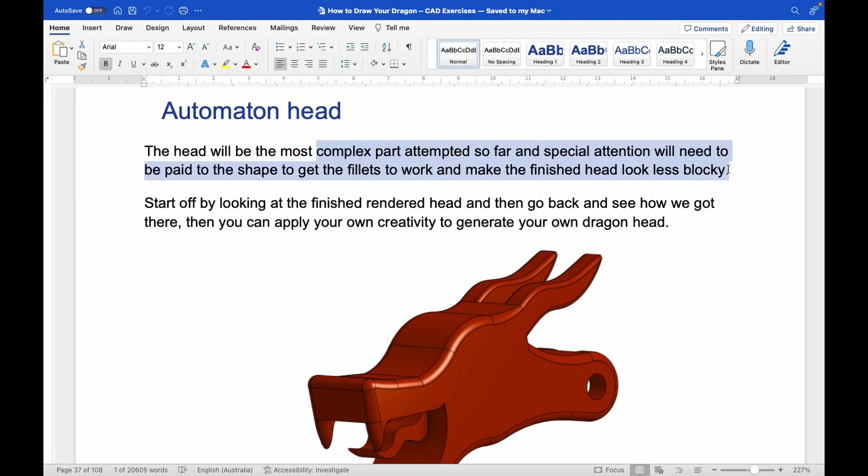So you can customize this a little if you wish. More teeth, less teeth, shapes, things like that. But we need to all start in the one place. So if we look at this section of the drawing, we've got to draw a block to start with, 42 by 20. And through the origin, we've got a circle, the center's on it with a diameter of 15, and then two concentric circles here.

The diameter 8 circle edge touches this line at the midpoint, which means it's 4 mm in, and from that center point there we have a diameter 3 circle. Let's start there. Okay, so we're still in our Dragon components. Add, create part studio.

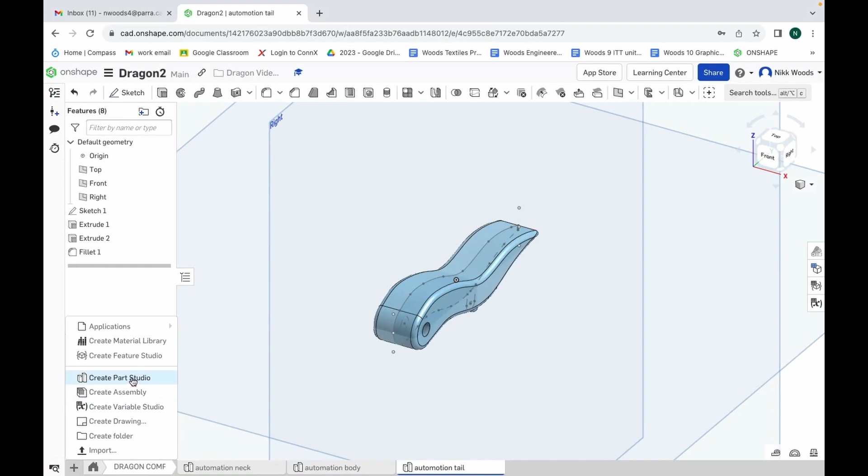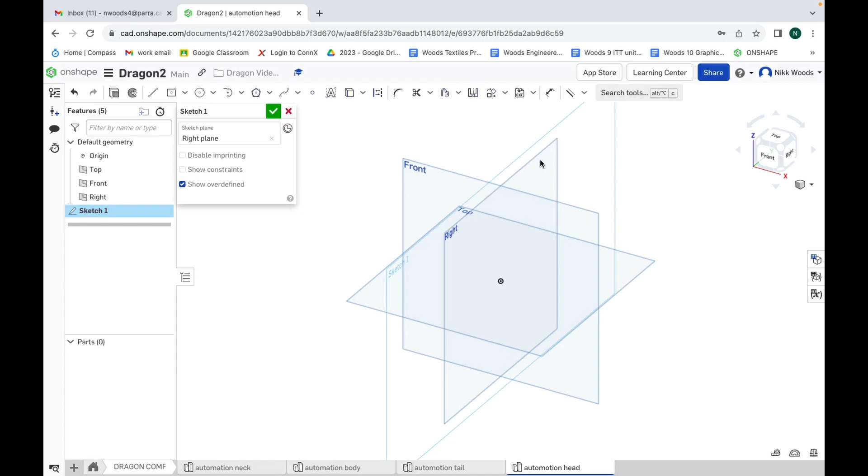Right click, rename, Automotion head, enter, and we're drawing this from the right plane. So sketch, select the right plane, click N, away we go. Rectangle, click, move, click. We said that needs to be 42, enter, and the next one is 20, enter. So it mostly fits in here, but to start with, definitely. Okay,

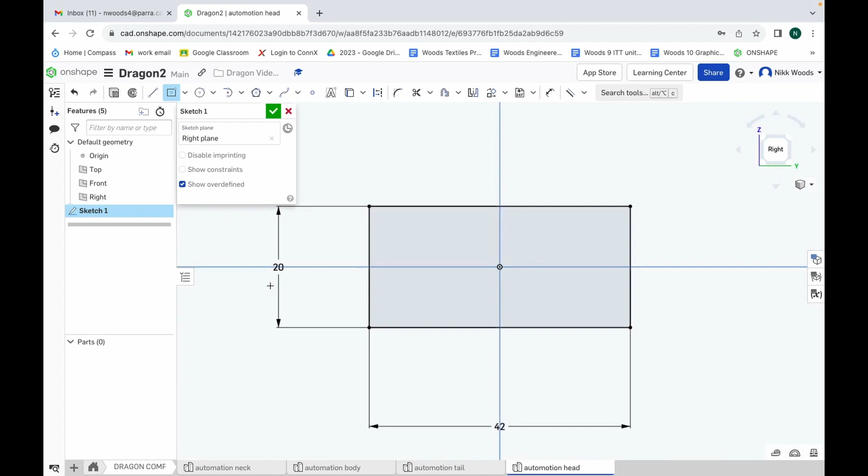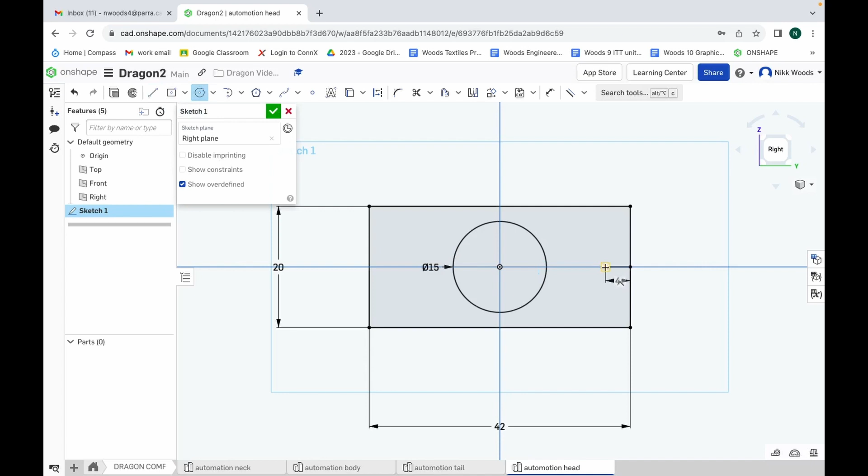let's make it bigger. Right, so circle, easy one from the origin, click, click, and we're making that one diameter 15. Enter. Okay, I'm going to come out here to the midpoint here, and I'm going to come back and make that 4 mm. Enter, escape, circle. This one, click, click, we're going to make that 8. Enter, and circle again, click, click, and we're going to make that one 3.

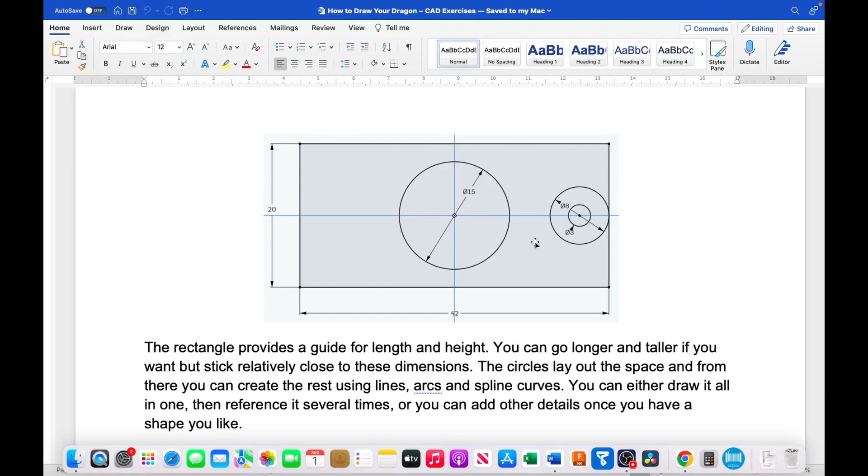Enter. M for trim, let's get rid of that construction line. And that's the first part of our drawing done. Okay, leave the sketch open. We're going to come back here, and we've got a radius of 16 here. We've got a radius here of 10 and a radius here of 12.

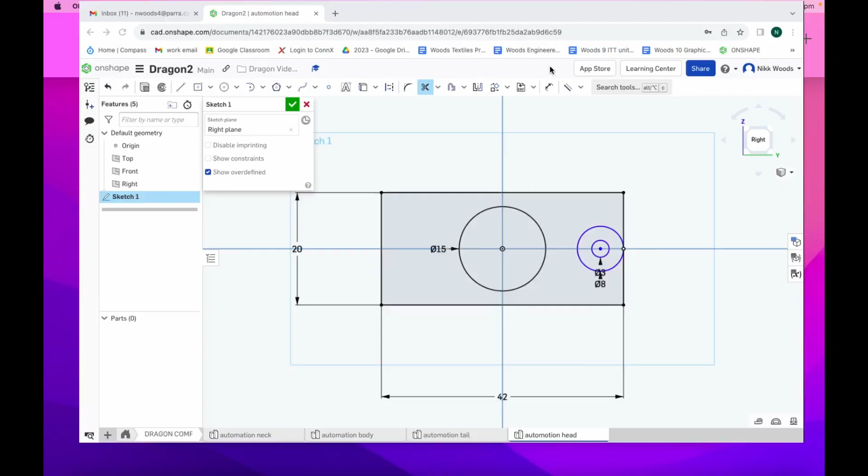And so you're going to use the 3-point arc tool from about 2 o'clock to 11 o'clock. Type in your radius of 10 and then do your tangents. Same method down here. Okay, we'll do the 10 one first. So from, what do we say, about 2 to 11. So 3-point arc tool from about 2 to about 11. And we want that to be 10.

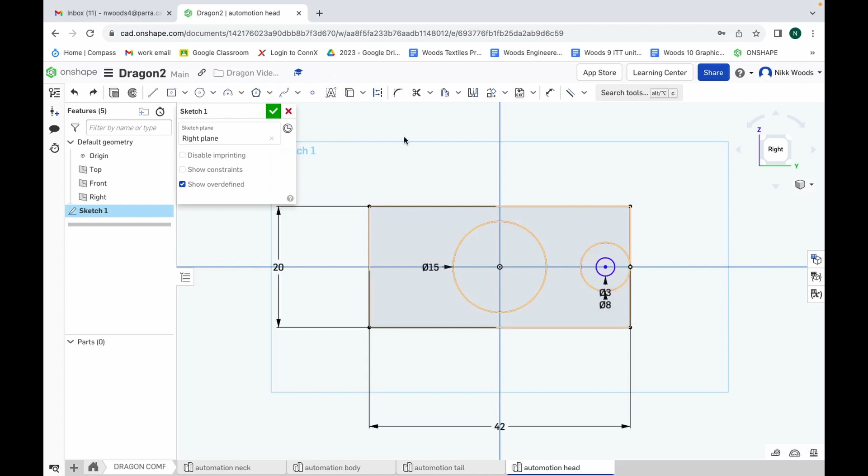Enter. Whoa, that should not have moved. Control Z. Let's make sure nothing's selected. Escape. Okay. 3-point tool. Just going to zoom in here. From about 2. About 11. Enter. Interesting.

I think this is a glitch. This happened earlier when I was working on a different part, and then when I closed it, came back in, it didn't do this. But I do believe I found a way to fix this. Let me see if it works. So I want to make the distance from, yeah, see, and it's moved it up off that horizontal line as well. I want to make the distance from here to here.

No. Dimension from here to here is supposed to be 4. Okay. And the dimension from here to here is meant to be 0. Okay, so let's just put it back in place and kept that radius at 10. Hopefully you don't have to do that, but now you can see that you can move things back if it does move on you, but it shouldn't.

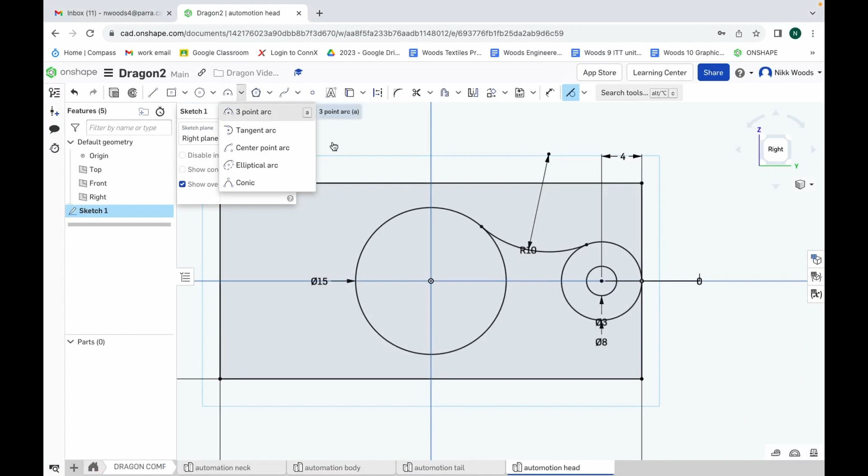About 5 to about 7, radius of 12, enter. Okay, let's do our tangent tool. Okay, nothing moved, see? Very strange. Same technique, two different methods, but we can fix them.

Okay, so there's those two set curves, and there was one coming up this way at a radius of 16. So he comes across and he's just off to the left of that point there. So I'm just going to eyeball it. Three-point arc. I think he was from about there to about there. And he was a radius of 16. Oh, he comes right from there. I'll go back and fix that up.

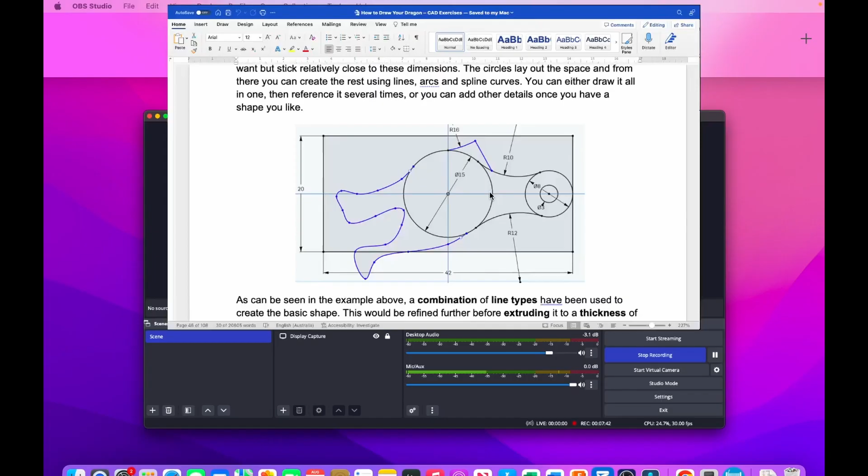Okay. Ooh, he looks a little different. He just gets cut off shorter. That's okay. So I'm going to draw a straight line from here to where it intersects up there. So from about there to there. Okay, M on the keyboard. I'll just trim that off. Just going to check down here. Yeah, I've got him on the line.

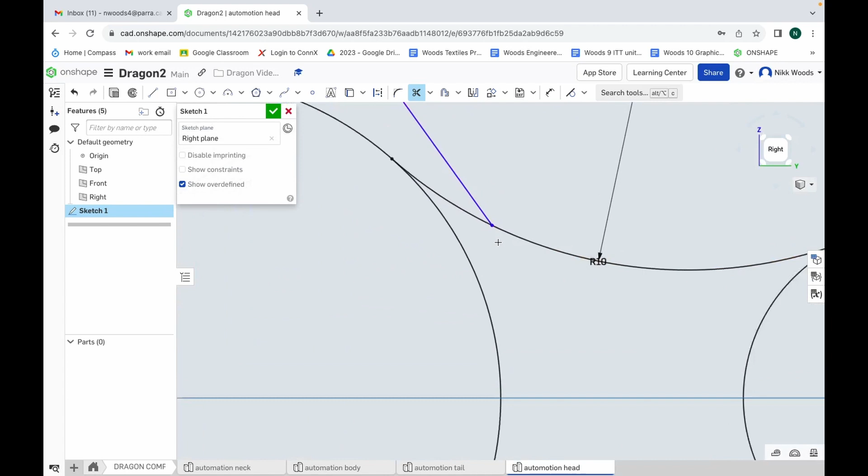Okay, so those were the things that were set. That radius, that radius, that radius, and we just drew a straight line in here to cut him off. Okay, let's jump back to our instructions. The rest of this is freehand. Okay, so using the spline tool and using a straight line as well when you want.

Okay, so you've got to think if you want to put some teeth in here, it'd be better if you had a straight line. Where the tongue is, you might want to have a straight line to work off there. You might want to have a straight line down here. Up to you. So I'm going to give this a go. And we'll see how it turns out.

Okay, so jumping back into Onshape, I'm going to use the Spline tool here. I'm going to start about here. Start to come down and curve. I already don't like it, but that's okay.

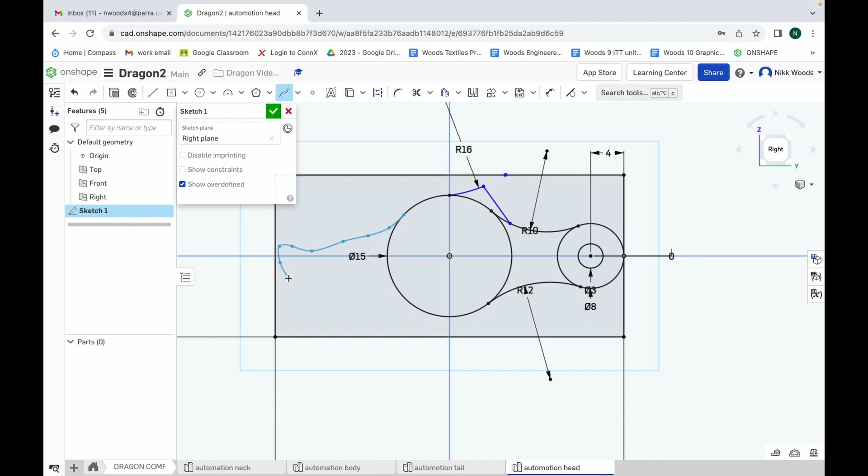I'm going to hit escape here. I'm going to get up a straight line tool and draw a straight line. Just going to zoom in a little. Just going to draw a little straight line just there, and escape, and I'm going to go back to my spline tool, pick up from there.

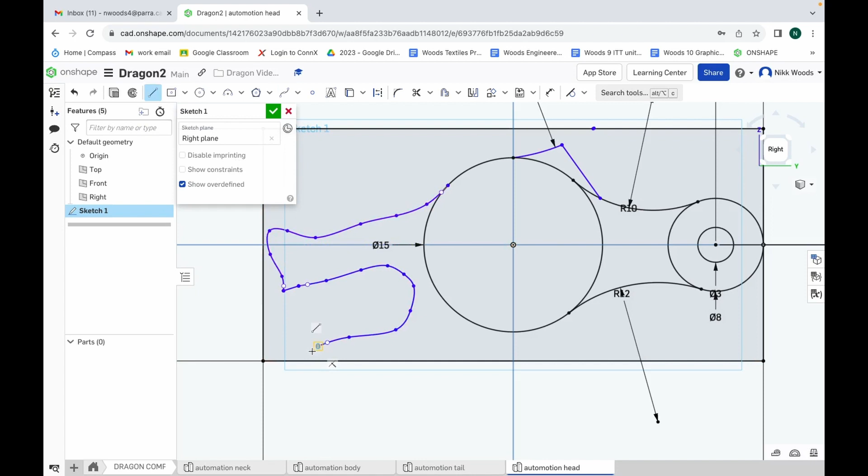I'm going to escape there and use a straight line. So I just want to have another tooth on the edge there maybe. Escape, and I'm going to jump back to my spline tool.

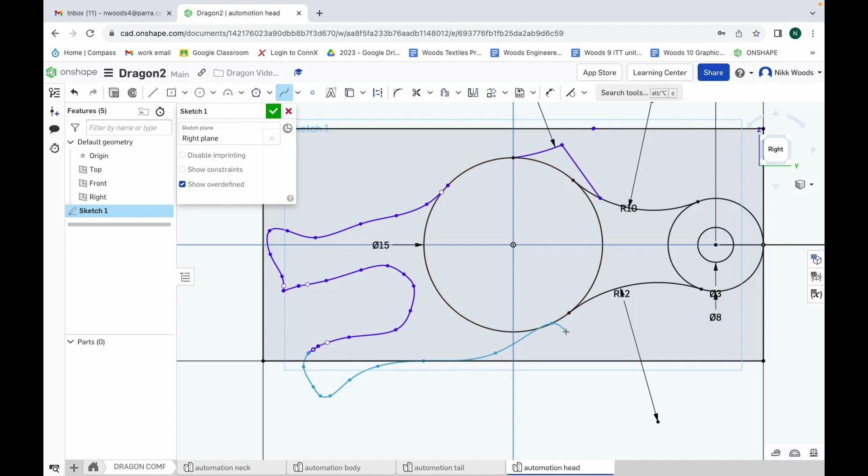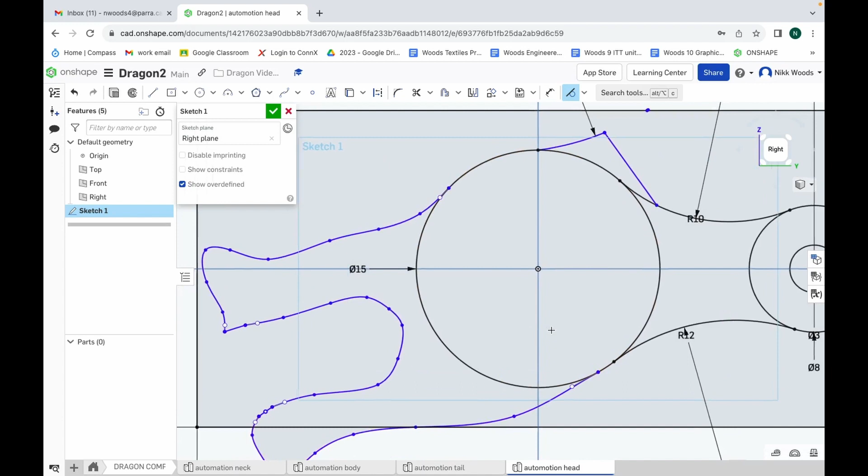Escape. Okay, and now I'm going to fix up my tangents here, hopefully. Whew, stressful. Tangent. This line to this circle looks pretty good. And tangent this line to this circle. Okay. Alright, not too bad. I'm no artist. Okay. Jumping back into here.

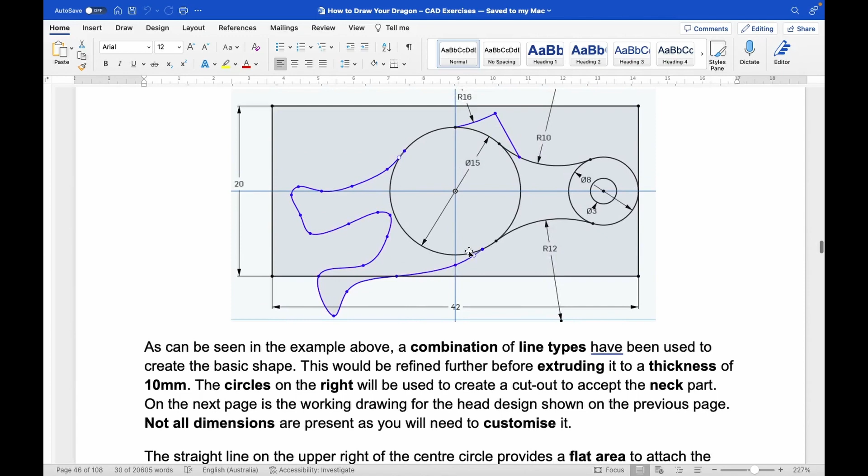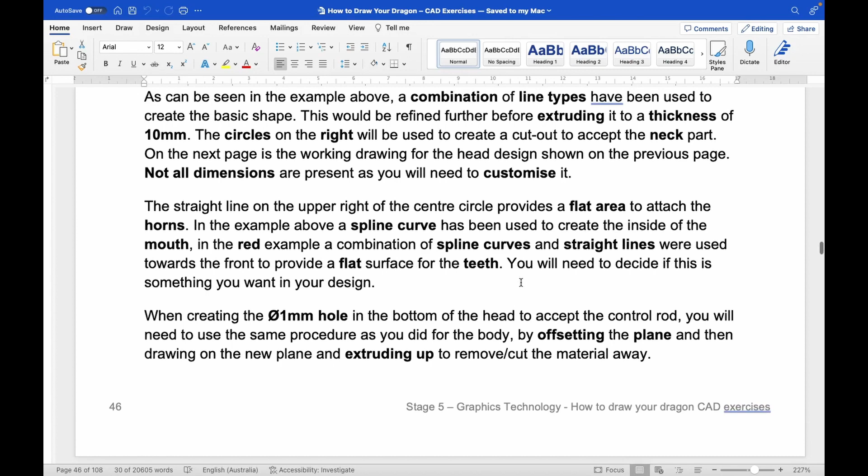Scrolling down. Scrolling. That's the next drawing. Okay, there's a bit to do here. So, just my gut instinct. We need to trim this line here, this one here, this one here. Then we'll have the main shape of the head, and we should be able to do a symmetric extrusion to a thickness of 10.

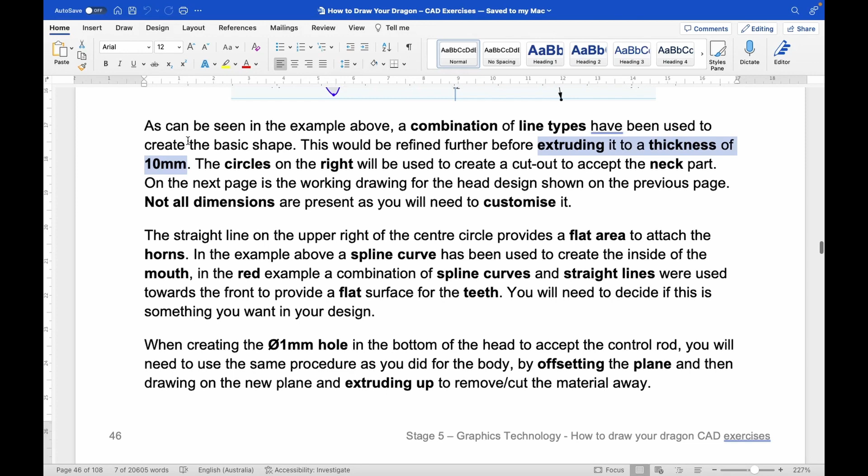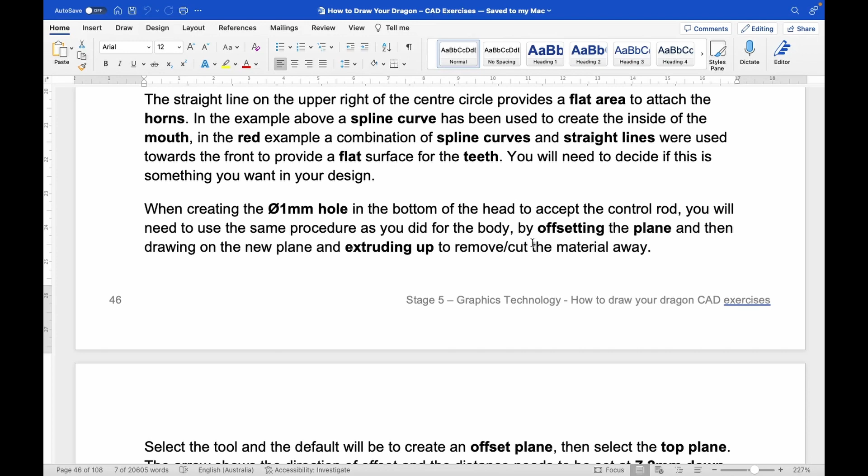Okay, and then we're looking at creating a 1mm hole in the bottom of it. That's the same as we did in a previous video where we have to offset the plane, draw the hole, extrude it up. Okay, we'll have a look at that later on.

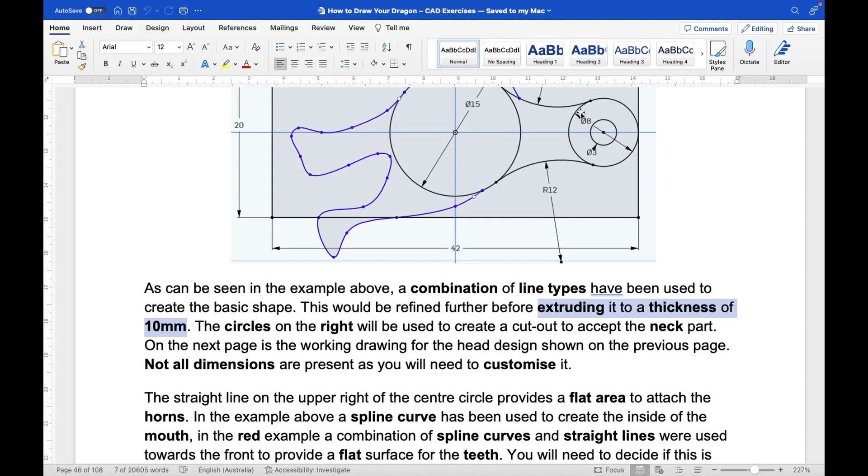So let's do our trimming here, here, here. Then we'll do an extrusion. I'm going to do a symmetric one because then I can always come back to that center plane to do the tongue, the teeth, and any horns you wanted. You can always do that. Okay. So switching back. Here we go.

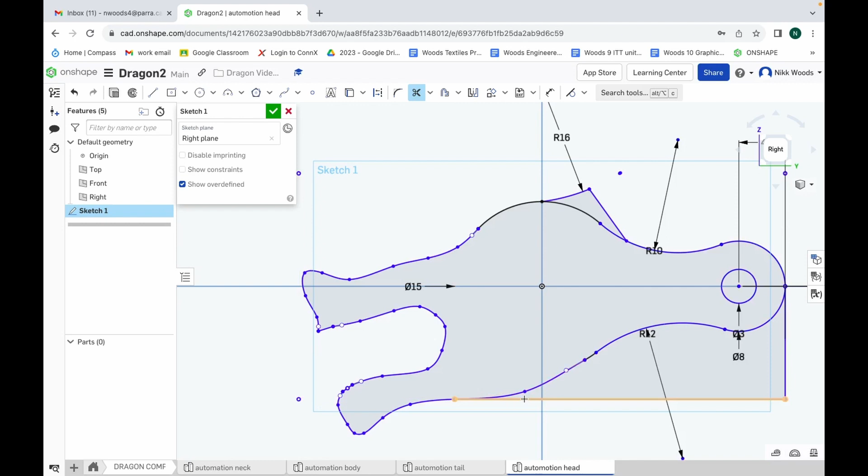M for trim. No idea why. Let's get rid of that one. Let's get rid of that one, all these outside ones as well while we're here. Just got it. That one. And I might get rid of this as well. Okay. And I'm going to do the extrusion now.

Sorry if you can hear the background noise. Schools are not quiet places.

That one, I'm just going to change to trimetric so I can see it happening at the same time. Okay, so that is not symmetric, that's off that back face there. So I'm going to change it to symmetric there. And a depth, we want 10mm, so that'll make it go 5mm each way. That's better.

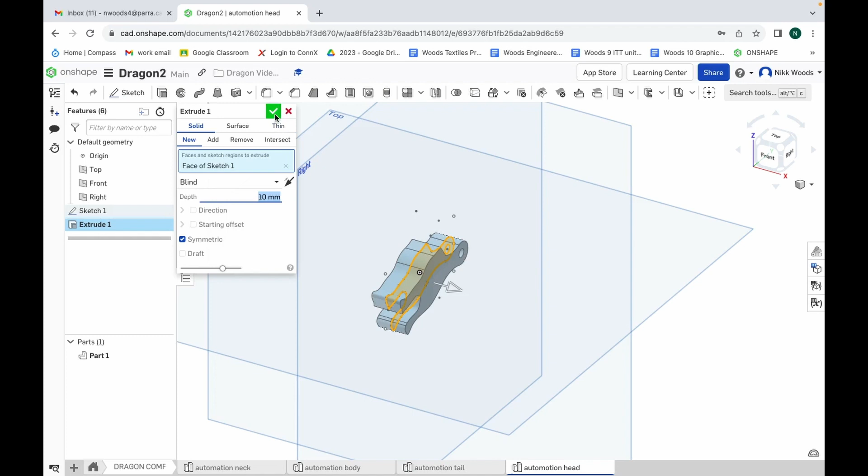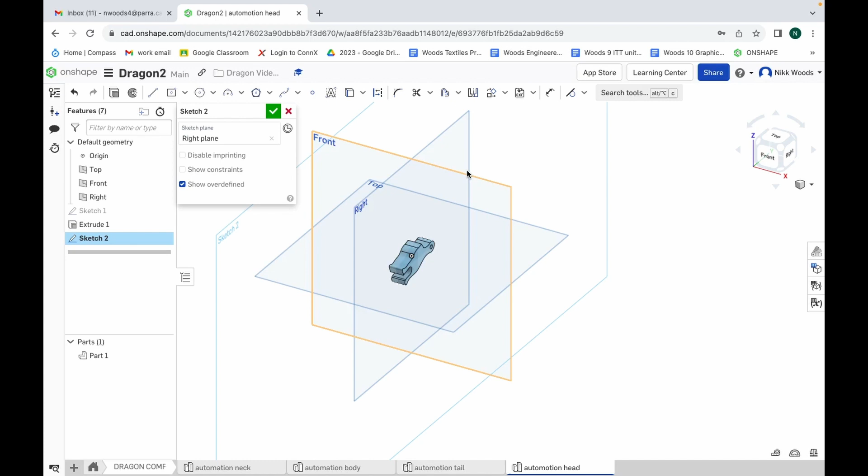And tick. Okay, now you should be able to, and I'll do this very soon, if we selected sketch again, we should be able to pick, zoom, the right plane that actually cuts through the center of the head. Okay. We'll see how that goes. Okay, but that's the main part done. Shortly I'll show you how to draw that hole in the bottom.

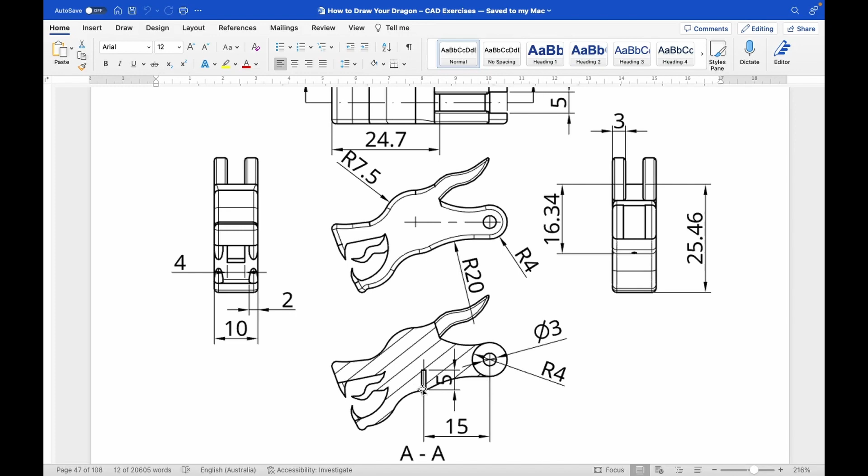Okay, looking at the next part of this dragon head, we're just trying to draw this little hole that a connector rod goes into. It's set 15 millimeters back from this 3 diameter circle. It has a depth of 5 mil and its diameter, or the width that you can see here in this sectional view, is 1 millimeter. And I only know that because it's written up here in the instructions when creating the 1 millimeter hole.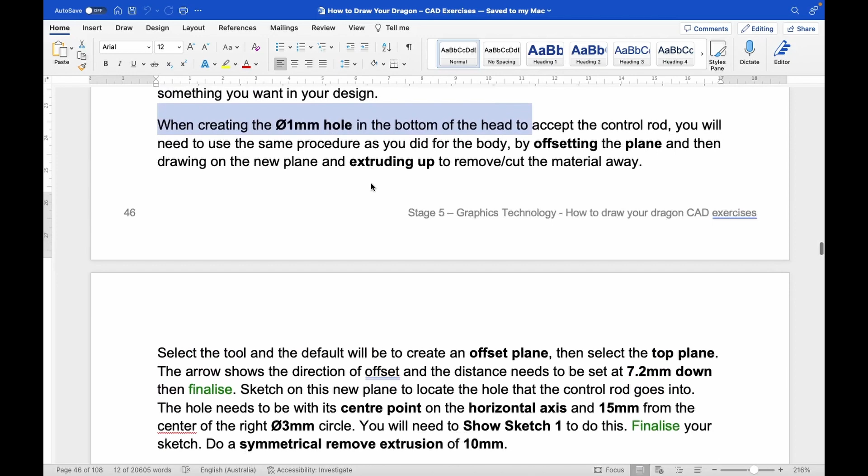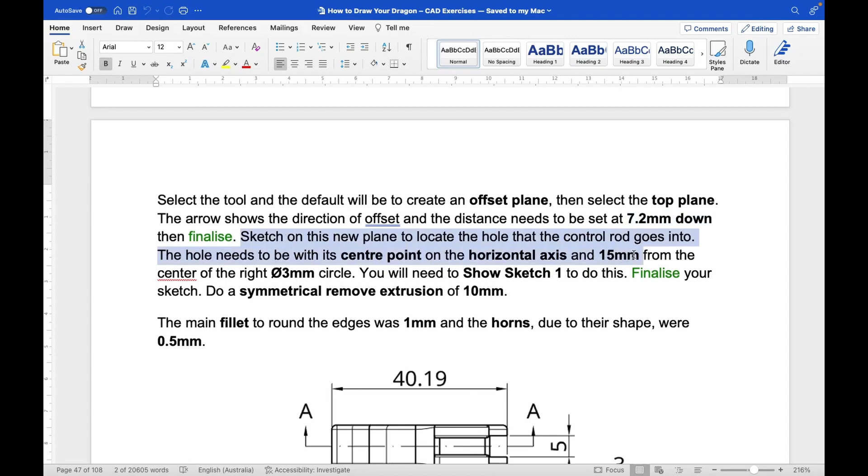Okay, so we first need to create an offset plane from the top plane, and it needs to be 7.2 millimeters down. We finalize that. Now, this next set of instructions is a little long-winded because we have to work out where on that plane this point is without being able to see that hole. Now, I've done a little bit of maths and I'll just show you what you can do as a shortcut.

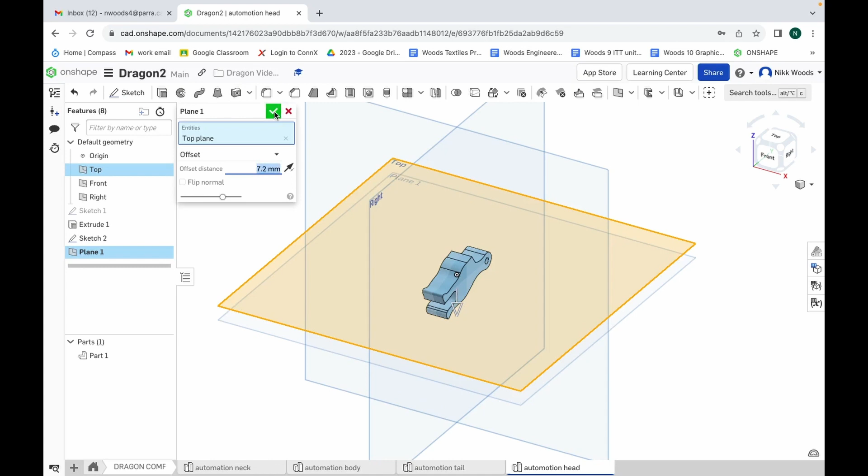So back in our drawing, we're going to select the plane tool, top plane, move this arrow in the downwards direction and make sure that is 7.2. Enter, tick, and we want to draw on that plane. So we're going to go to sketch, make sure you're selecting the lower one, not that one,

and click N. Now this bit's tricky because I can't quite tell. I feel like the screen's around the wrong way, so I just rotate here. Okay, and I just want to have a look, see my dragon.

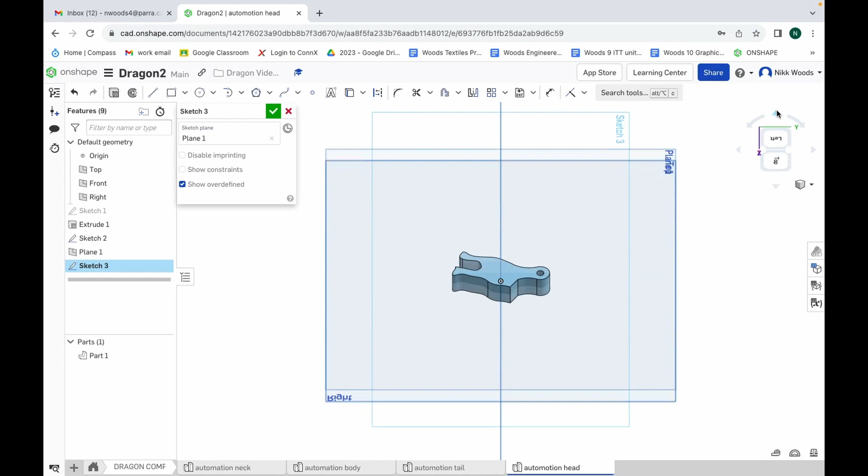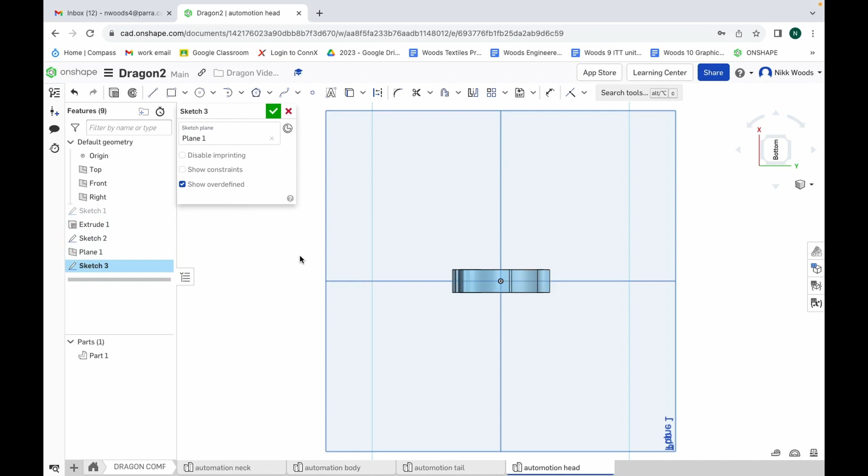Okay, so that's what I expected to see. So I want to be drawing here. That's the base of it. Cool. Now, see, we can't see that circle. We can't use a reference. It was saying that you can just show sketch 1. But I did some maths and it's just 2 mil back past the origin this way.

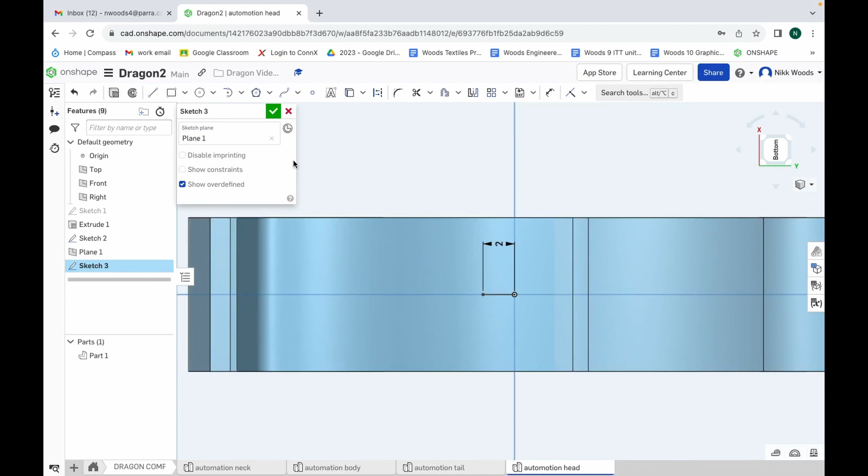Okay, so I'm just going to zoom in here, draw a line from here across 2 enter, escape, and I'm going to draw my circle, click, click, diameter 1, enter, M for trim. Just going to delete that line now, and I'm going to do a symmetrical extrusion.

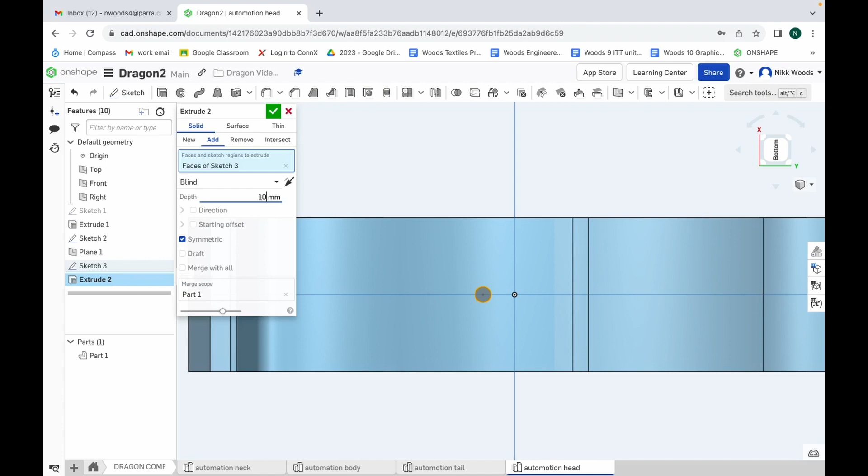Okay, so extrude this, symmetrical, 10. Enter. Can't tell if anything happened. I'm just going to go to the trimetric view. Oh, and it's a removal. Better click that. Okay, so you can see it's gone up through here.

And that should be right. Let's click tick and have a look. Okay. So there's the hole. And it hasn't gone through the top. Okay, so as simple as that. Let's have a look at the next instructions. Done, done, done, done, done.

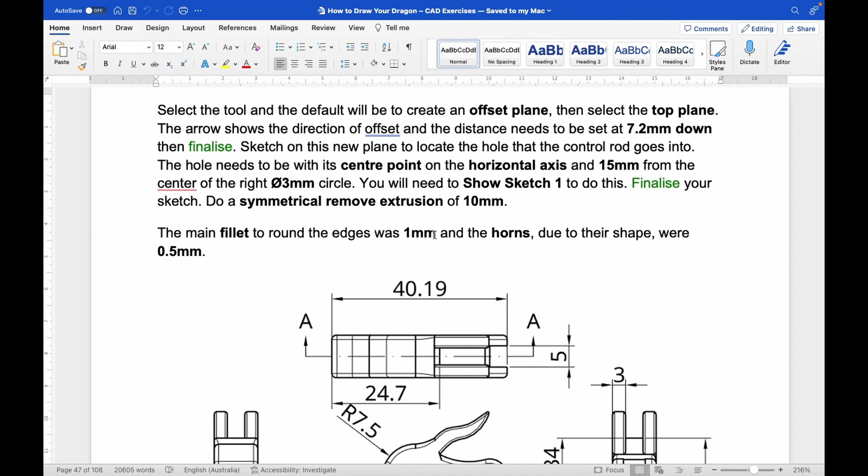The main fillet to round the edge was 1 millimeter, and the horns, due to their shape, were 0.5 millimeters. So what you can see here, this double line around the edge is actually just the edge of the fillet. So we can select the perimeter of the dragon just to where you want, because I haven't drawn in any teeth or anything, and put that fillet on that will work for you.

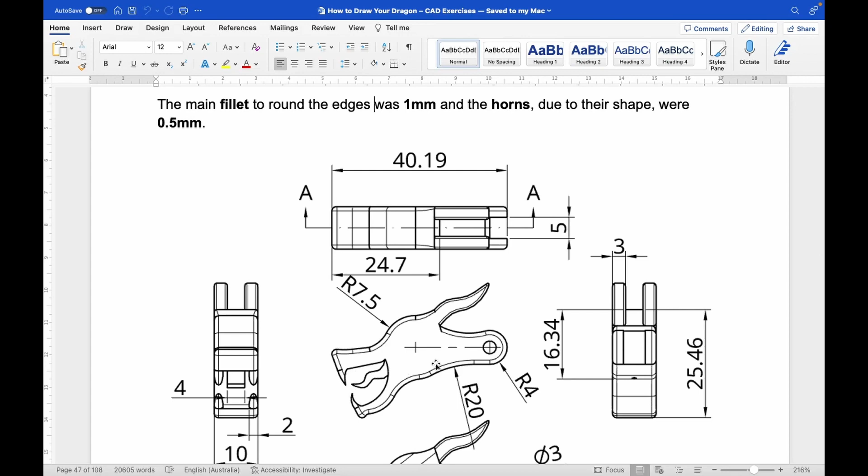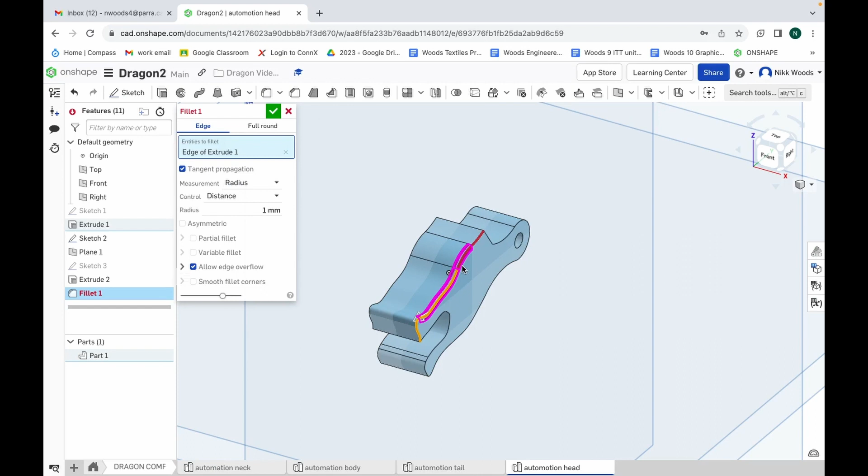Okay, so I'll switch back to trimetric, and I'm going to click on the fillet tool and just select each part of the curve that I want to do this on.

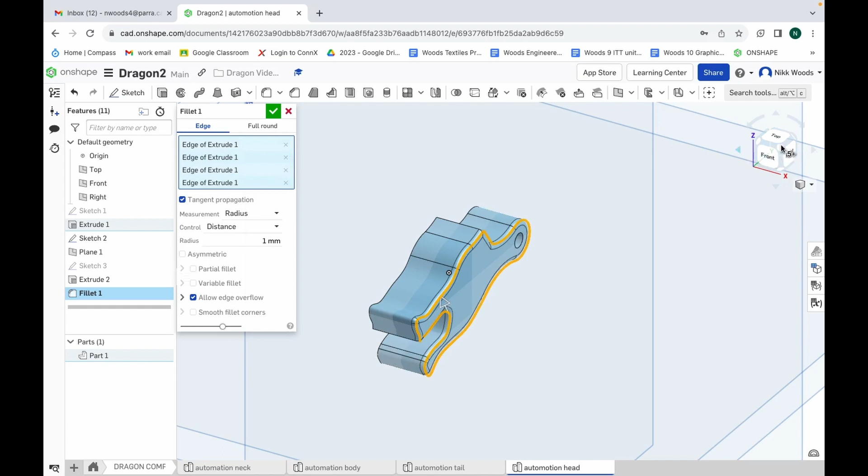Just want to be sure that I've got all of it. So making sure I've got no gaps. Looks okay to me, and I've got 1 millimeter there, that looks okay. Tick. Okay, and we can do the same on the other side. Oops.

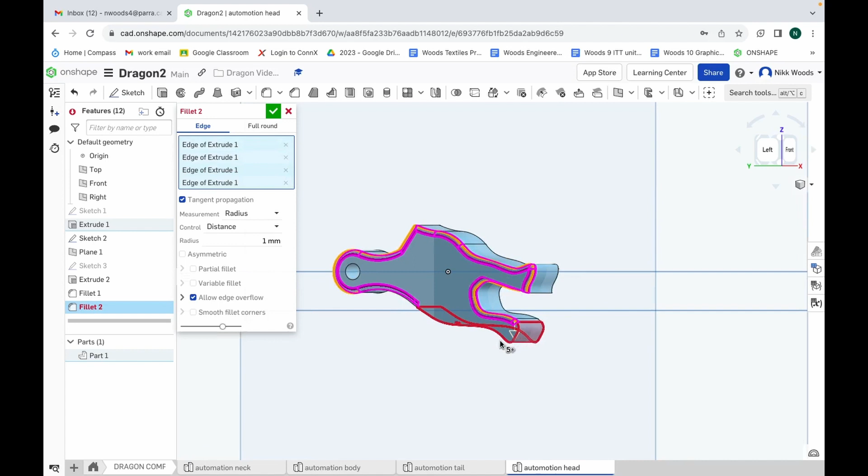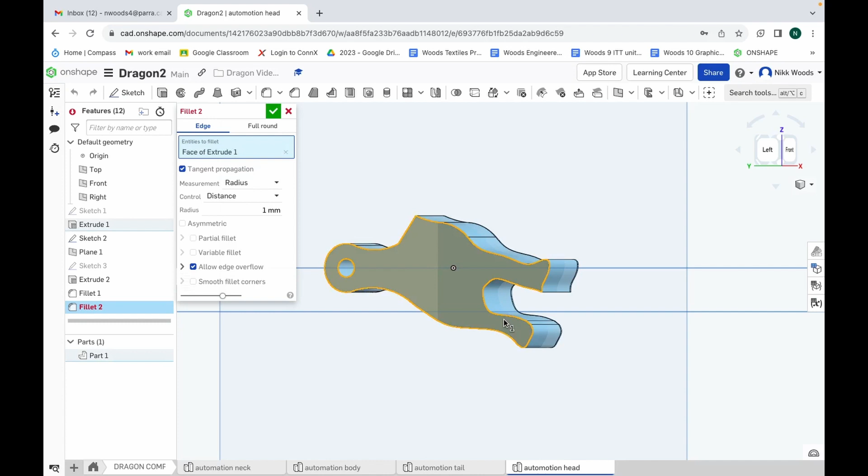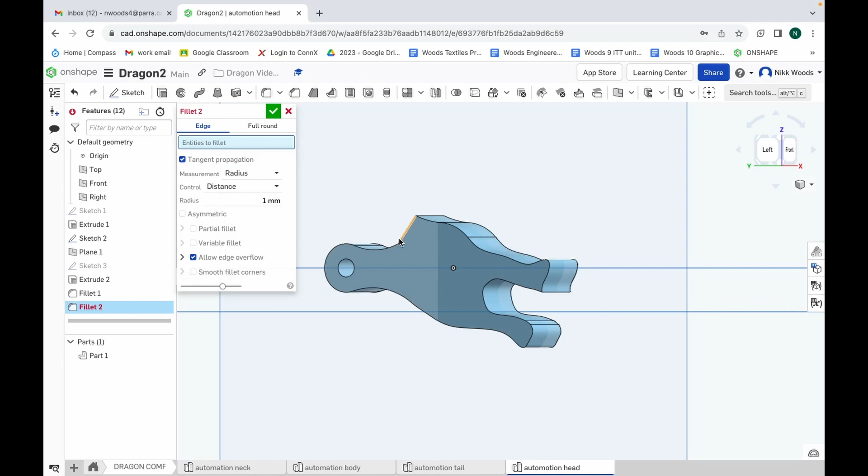Not sure why that's turning red. Let's just escape. Fillet. What if I can just deselect that circle? We'll just do bit by bit. Zoom in.

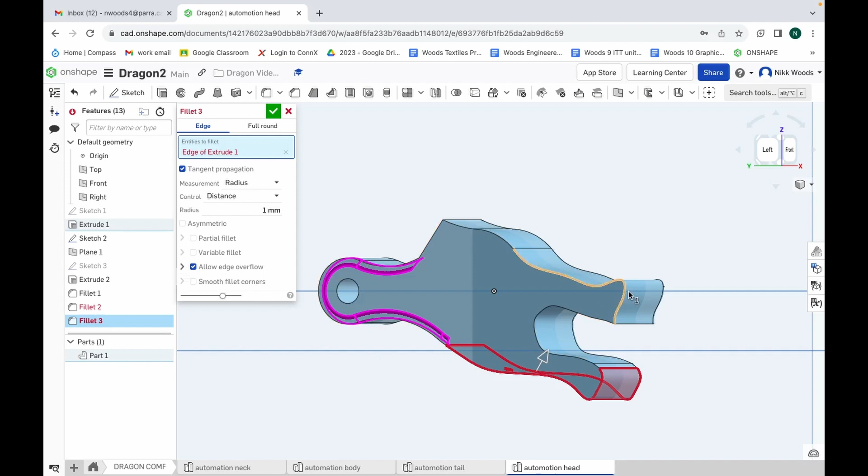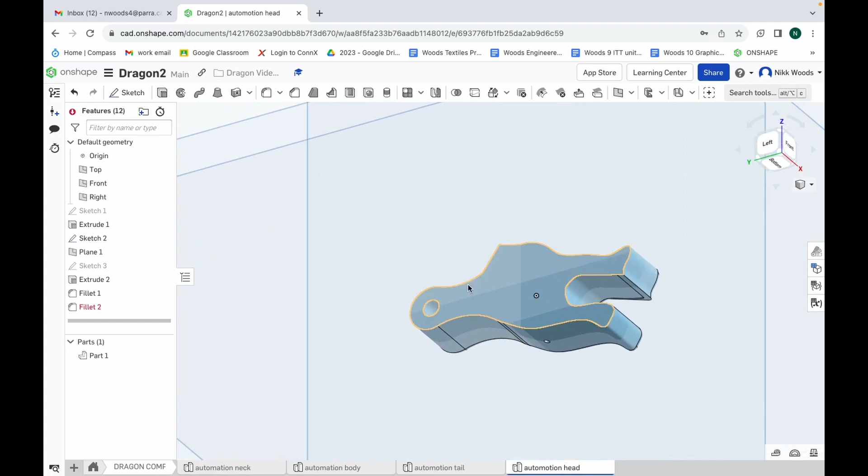Okay, 1 millimeter, tick. No, it didn't quite work. What's happening here? Ah, I see. Should be working. Fillet. I have noticed that Onshape can be a little glitchy.

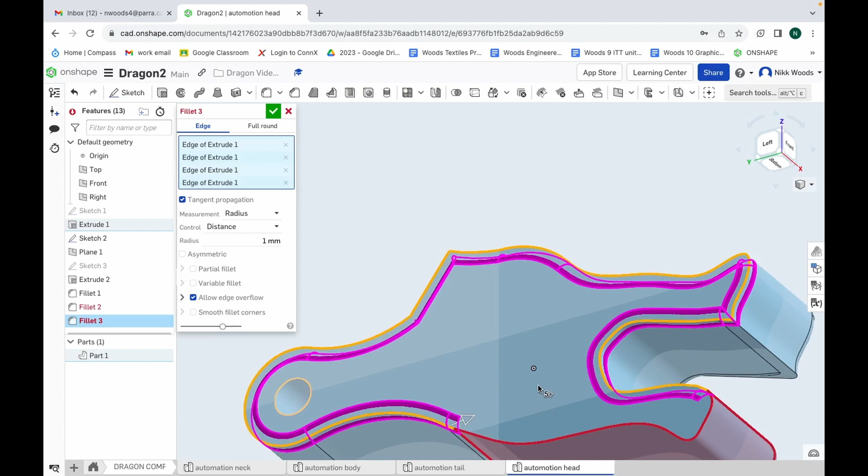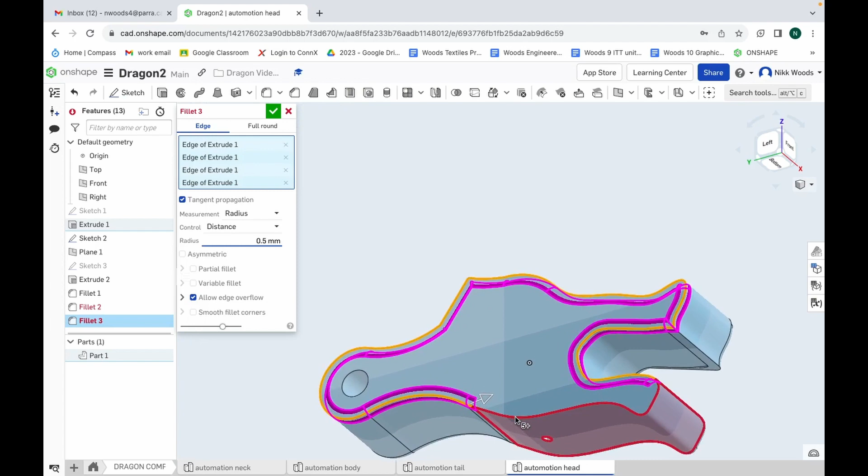It's not wanting us to select this shape here. It's interesting. Let us do it on the other side. I'm just going to change this, 0.5. Just hit close. Let's go back to trimetric. Just check it did do it on the whole shape. Yep.

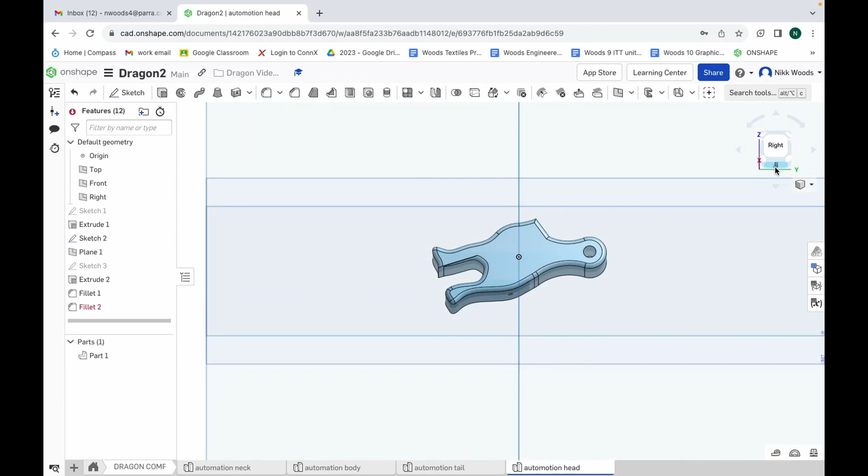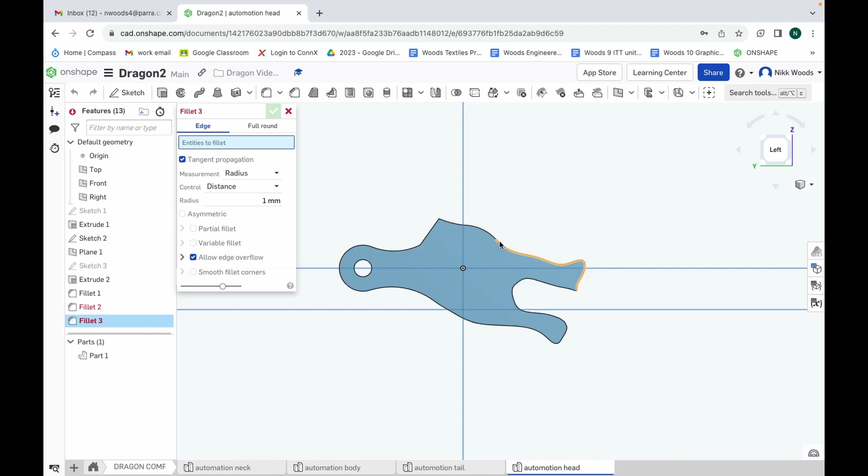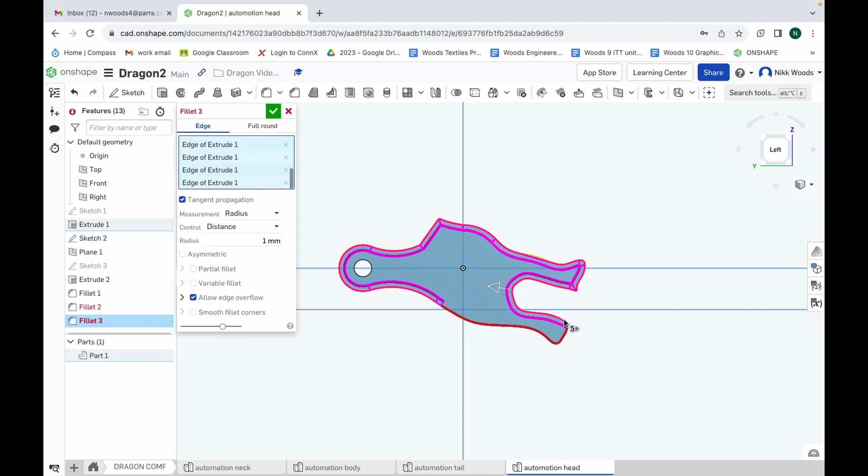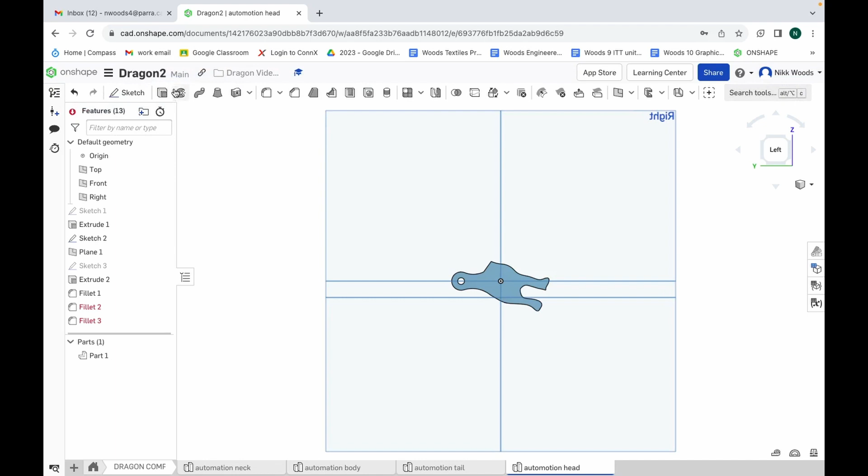Should be allowing us to do this as well. Maybe I'll start with that one. One millimeter, tick. No. So I'm going to try something. It should have saved automatically. Just going to close it and open it again. Because I can't see a reason why it would work for one face and not the other.

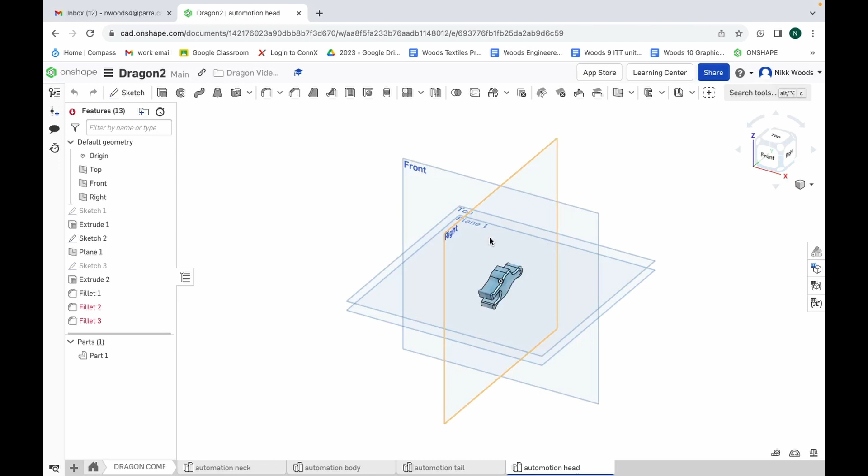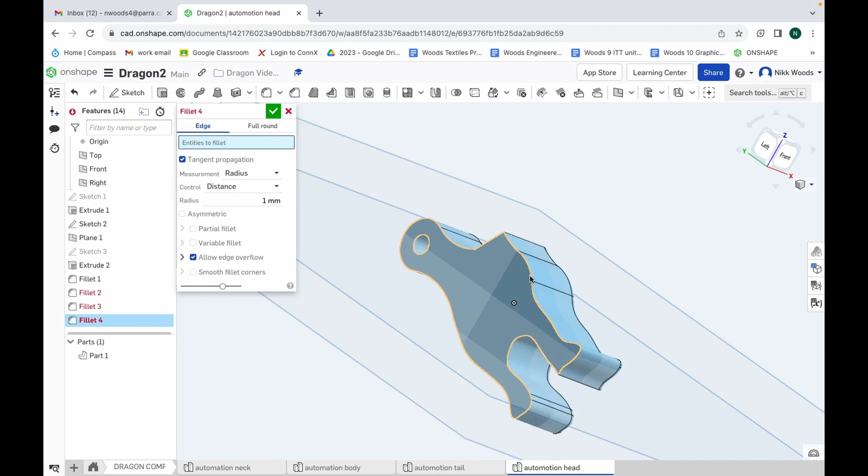Do we want to fillet? Don't want that one because I don't want that inner circle done. Not that it would really matter. Doing the same thing.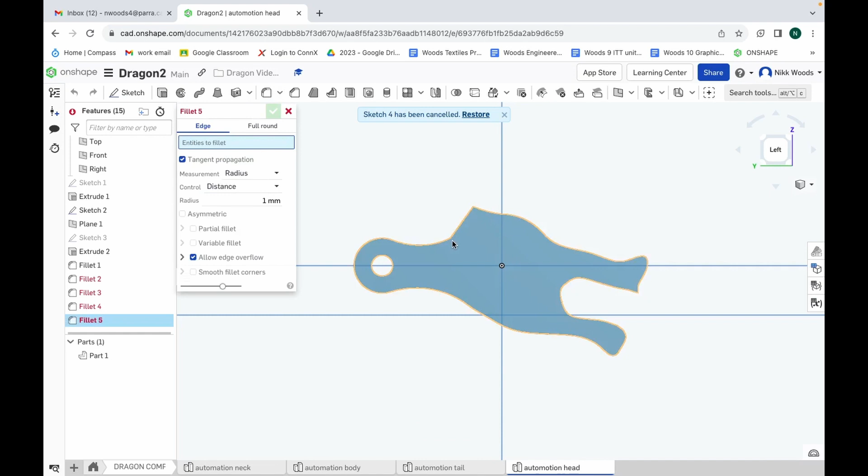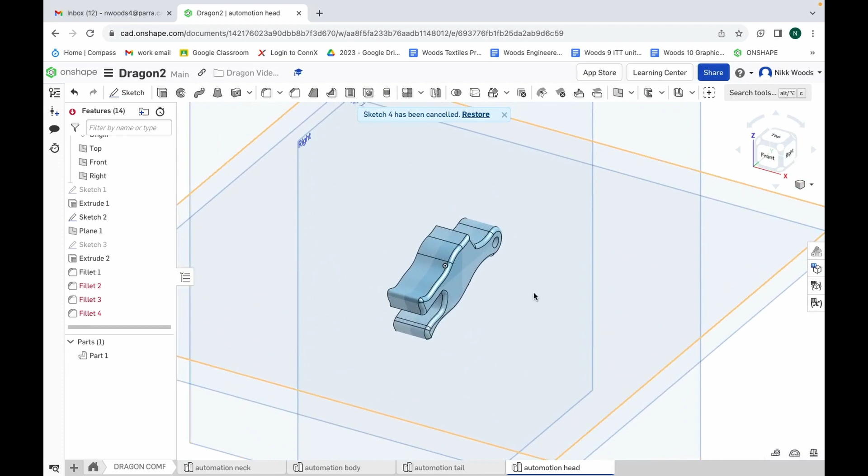Not wanting to do it. Very bizarre. It should do it. If it did it to one side, it should do it to the other because that was drawn symmetrically. I have one solution.

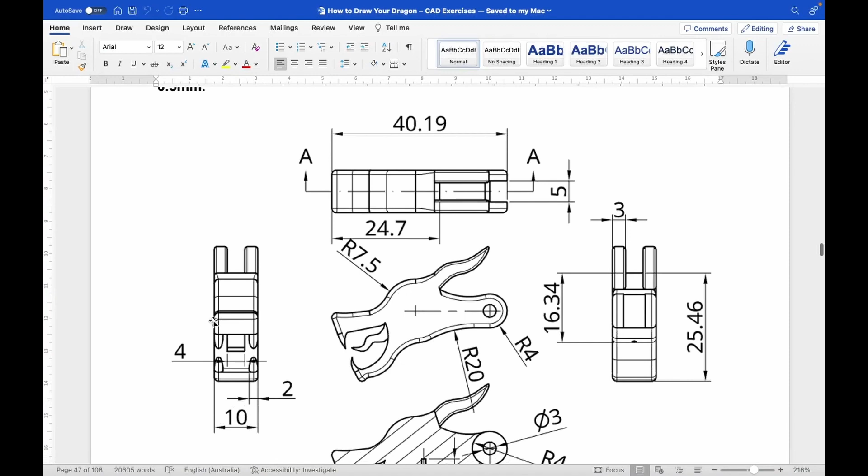Now I just need this width, our original width of the head. So let me just jump back into our instructions. And it was 10. So I'm thinking if I extrude it back as a removal 5 and then I do a mirror, we'll see if that works.

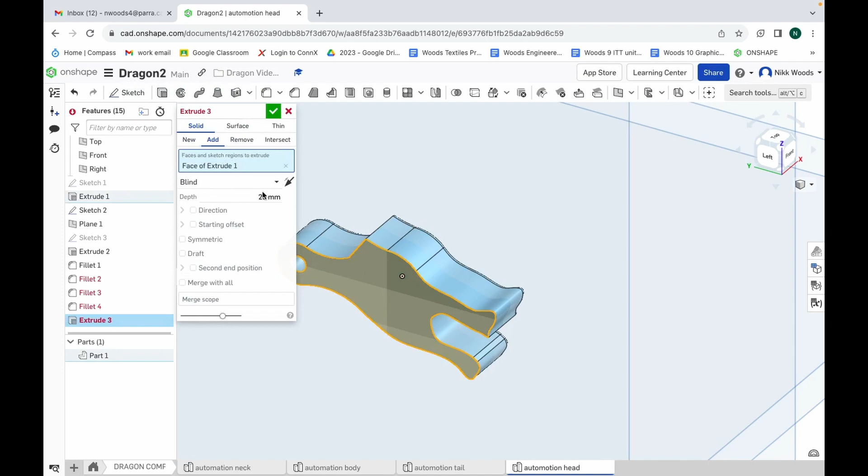So I'm going to extrude this face here as a removal 5. Enter. Oops, silly me. As a removal 5, tick. Okay, well now you can see the depth of that hole. Now I'm going to do a mirror.

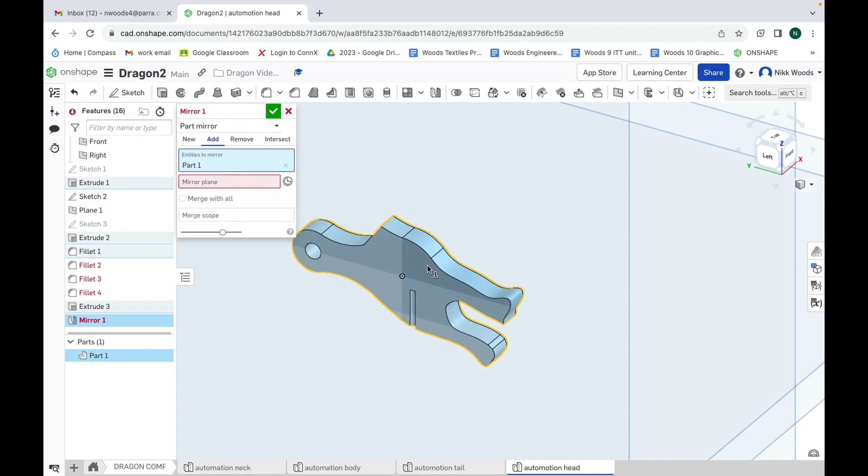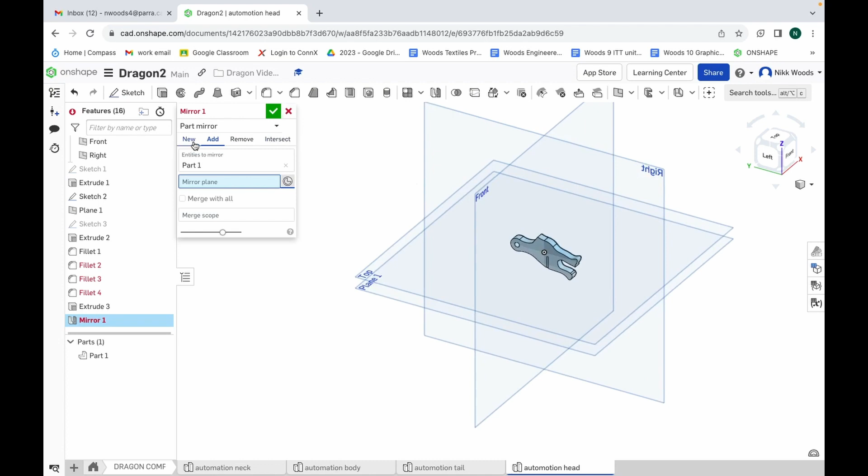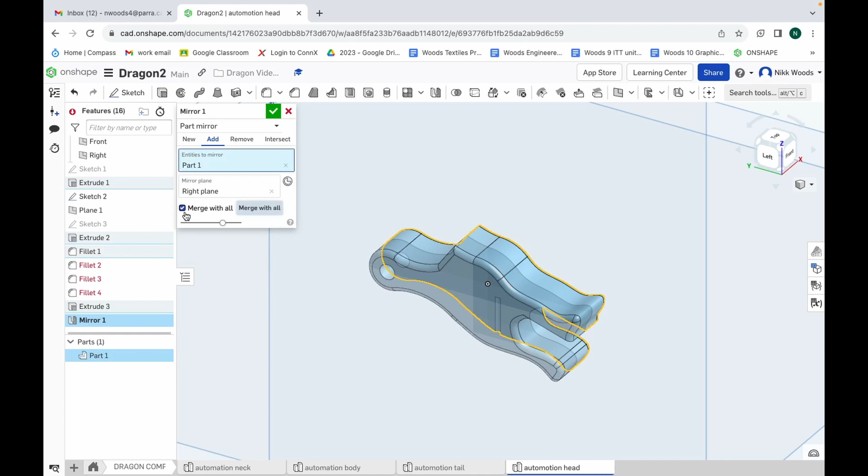Add entities to mirror. This mirror plane. Ooh. Should be the right. There we go. Right. Bizarre. That's worked. So now I've got that fillet the whole way around on both sides.

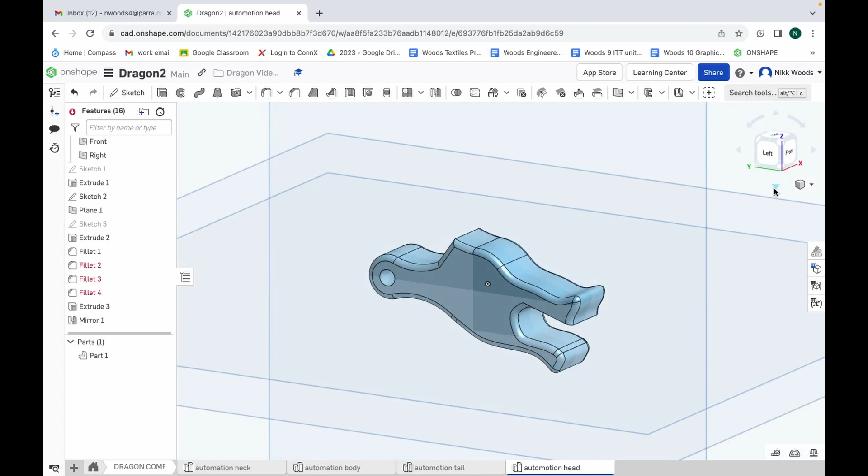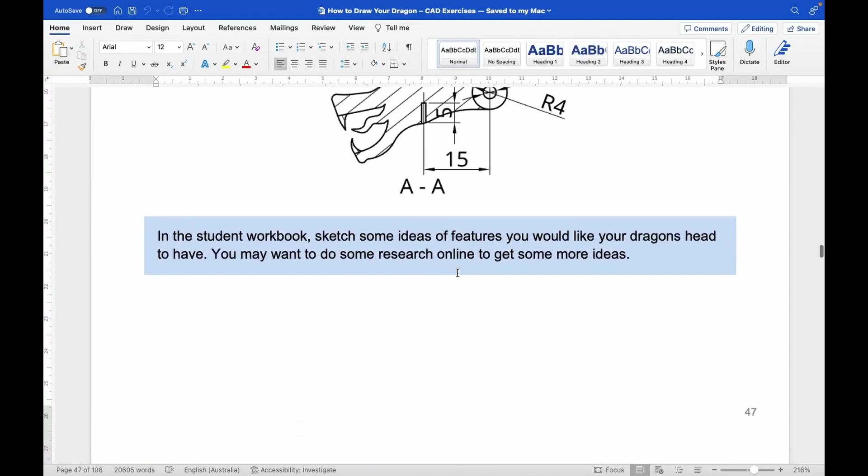Yeah, but the hole's still in the bottom. Very bizarre. And guys, you know what? It's probably going to work on yours without having to go through those problem-solving steps. So I'll just switch back to trimetric. There's the dragon head, remembering you can draw your own teeth in. Any spikes, any personalization is fine. Okay. And the next section we're going to look at is the automation wings.